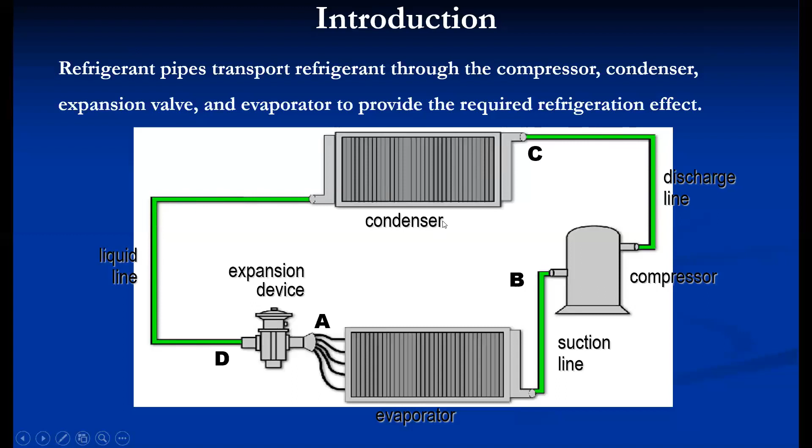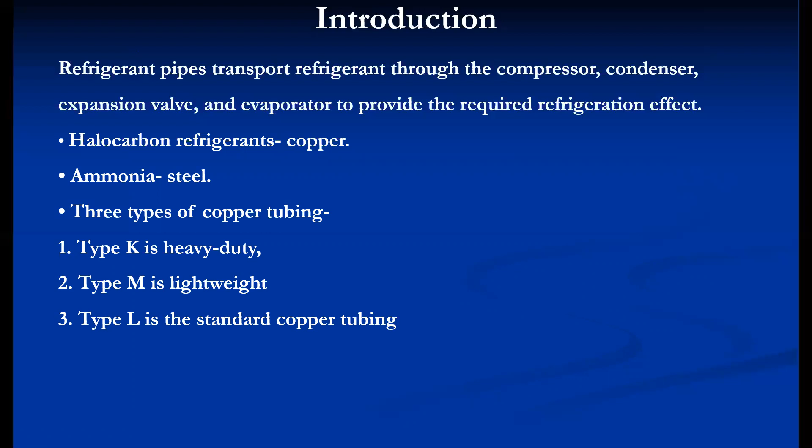As far as piping is concerned, for halocarbon refrigerants, copper piping is recommended. For ammonia, since ammonia attacks copper, steel piping is used instead. There are three types of copper piping generally used: K type is for heavy duty where the pressure range is high, M type is lightweight, and L type is standard copper piping. For most applications, L type piping is used.

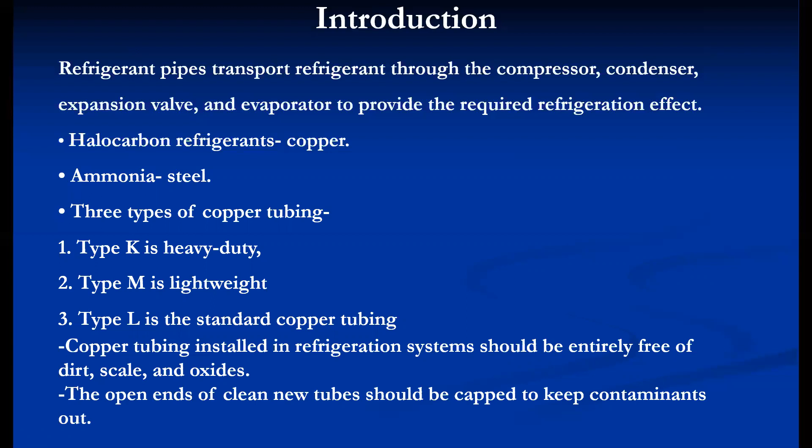Copper tubing installed in the refrigeration system should be entirely free of dirt, scale, and oxide. Initially, the open ends of clean new tubes should be capped to keep contaminants out. During transportation of copper tubes, sealed copper tubes are used so that dirt particles or scale oxides do not enter, because if air or dirt is present inside, it creates an oxidation reaction during the brazing process. So care is taken for the copper piping.

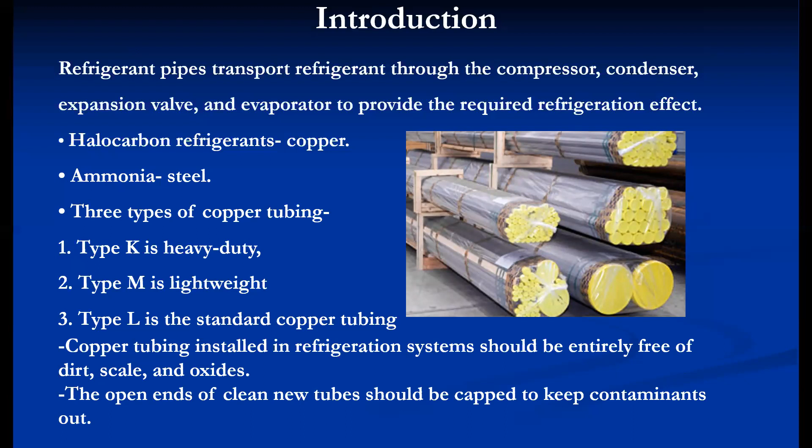So this is a brief introduction to refrigerant piping. In the selection of pipe size and material, the following points must be considered.

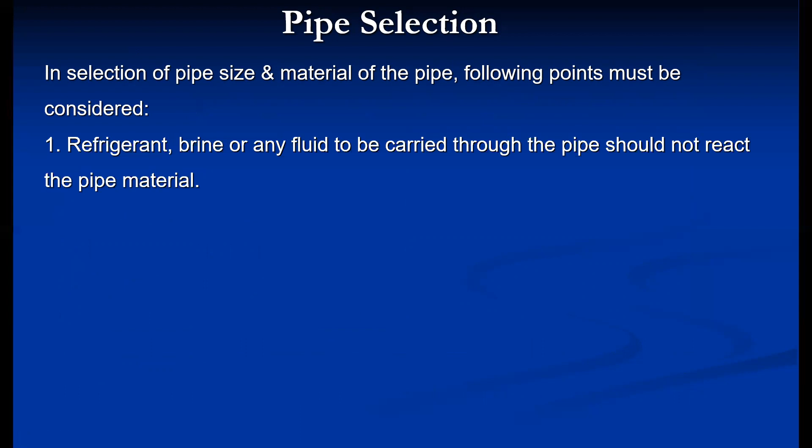The refrigerant, brine, or any other fluid carried through the pipe should not react with the pipe material. The pipe size should be large enough that it does not create excessive frictional losses, and also avoids objectionable noise because of high velocity. It must withstand the pressure of the fluid—this care is taken while selecting piping for the discharge line.

The cost of the pipe should be minimum, or it is perhaps a last preference—it should not be compromised with quality. As far as possible, the minimum piping is recommended for minimum refrigerant quantity. So the cost factor is considered, but not as a prime factor.

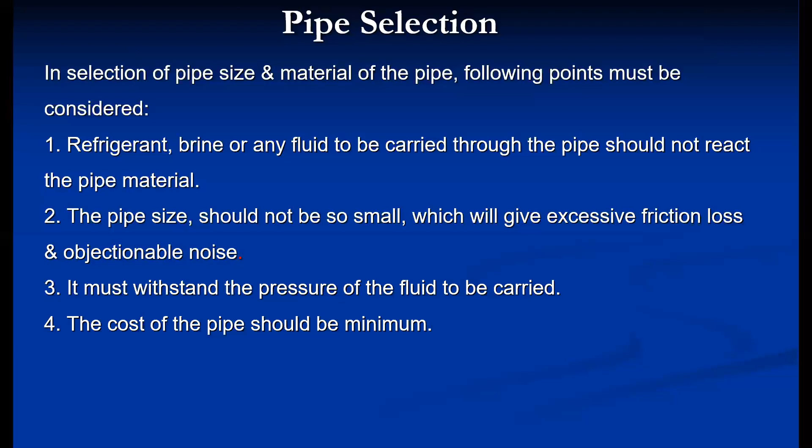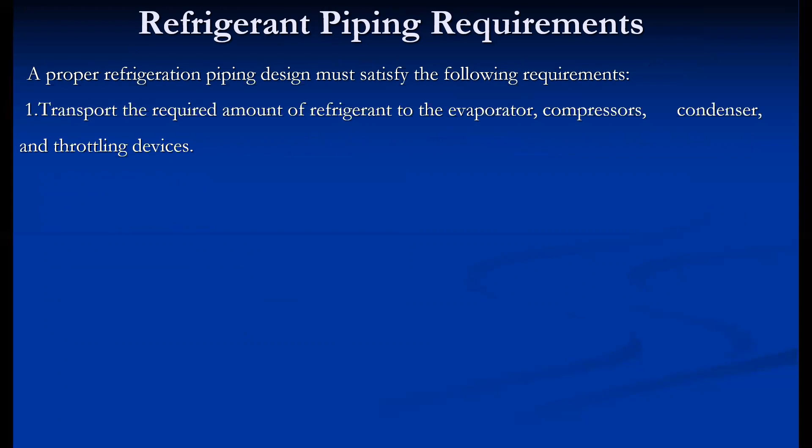Regarding piping requirements, proper designing of refrigerant piping must be there for smooth operation of the refrigeration system. It must satisfy the transportation of the amount of refrigerant to the evaporator, compressor, condenser, and expansion devices, so proper circulation with adequate velocity should be there.

It should provide the optimum pressure drop in the refrigeration lines. In order to avoid excessive pressure loss, some bends and excessive length are not provided. So pressure drop should be optimum, because the pressure drop causes considerable effect on the performance as well as the COP of the system.

It should ensure the adequate velocity to return the oil to the compressor at all steps of unloading of the compressor, to maintain an adequate level for proper lubrication. Because generally the system is working for different capacities, and depending upon the capacities, the refrigerant flow rate varies. So the adequate velocity should be maintained even for the low capacity to return the oil to the compressor, because there should not be any shortage of oil in the compressor, to increase the life of the compressor. So that care is to be taken.

Generally, where the oil separator is not installed, in that case, the adequate velocity is a must.

Flashing of liquid refrigerant must not occur before the expansion valve. In the liquid line, there is some heat addition that takes place after subcooling also. Due to heat addition, some liquid refrigerant, even at high pressure, if exposed to ambient conditions like a liquid line at 40 or 45 degrees Celsius, there is a possibility of heat gain, and due to that some refrigerant gets evaporated. If flashing happens before expansion, it may reduce the mass flow rate through the expansion valve. So as far as possible, flashing of liquid refrigerant must not occur before expansion. It is not at all desirable.

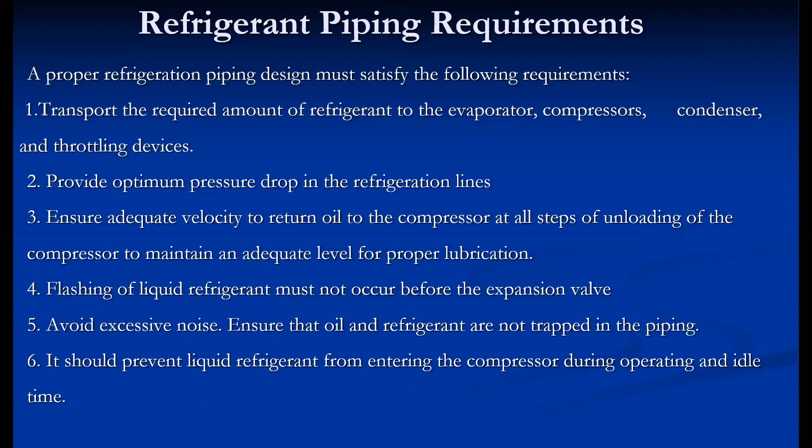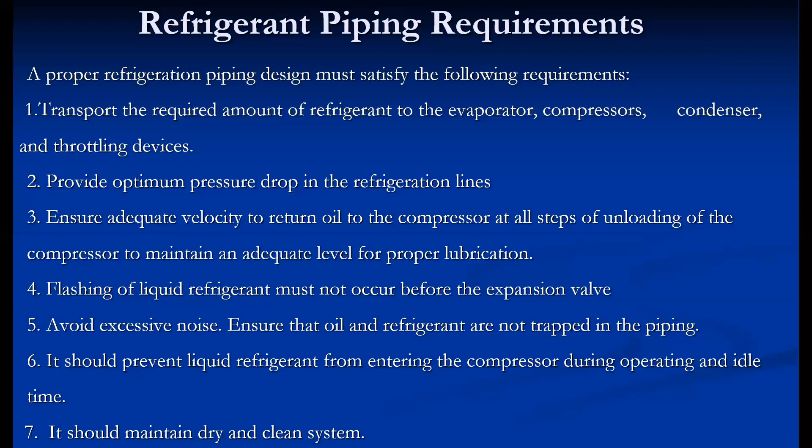It should maintain a dry and clean system, so there should not be any leakage, especially at the surface. All the surfaces should be dry and clean, because even some dust accumulation will prevent the rate of heat transfer. So these are the considerations, the requirements for a good design of piping. There are seven design requirements.

General piping requirements: it is recommended, if there are no stringent requirements, to use type L copper piping or tubing. For copper-to-copper joints, BCuP-6 without flux is used for the brazing operation. For copper-to-steel joints, BAg-28 non-acid flux is used.

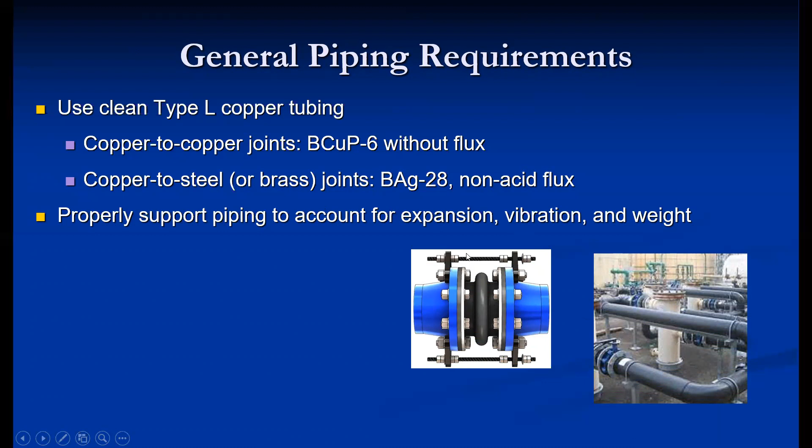Then properly support piping to account for expansion, vibration, and weight. Proper support should be given to the piping, and proper clamping should be there to account for the expansion of the piping due to heating.

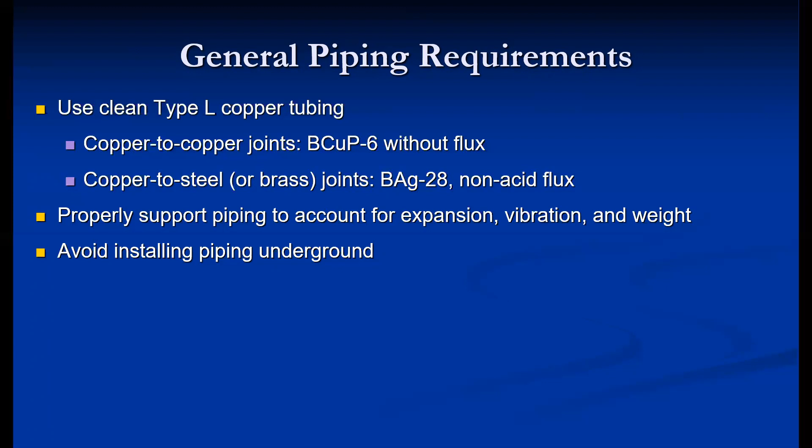Then avoid installing piping underground. Underground piping is not recommended for refrigeration applications, because it's very difficult to recognize a leak. In case of a leak, we need to dig it out. So underground piping is not recommended.

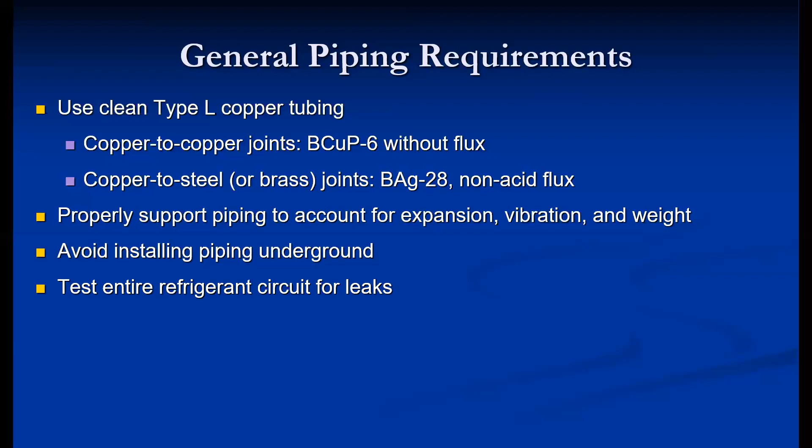Then test the entire refrigerant circuit for leaks. Before charging, it is very much essential that the entire circuit should be leak-proof, because if a leak is present, the refrigerant loss is a costly affair. Even if a leak is available, after charging the refrigerant, after a few days the entire system will be vacant. So to avoid that, the system should be tested leak-proof with nitrogen gas.

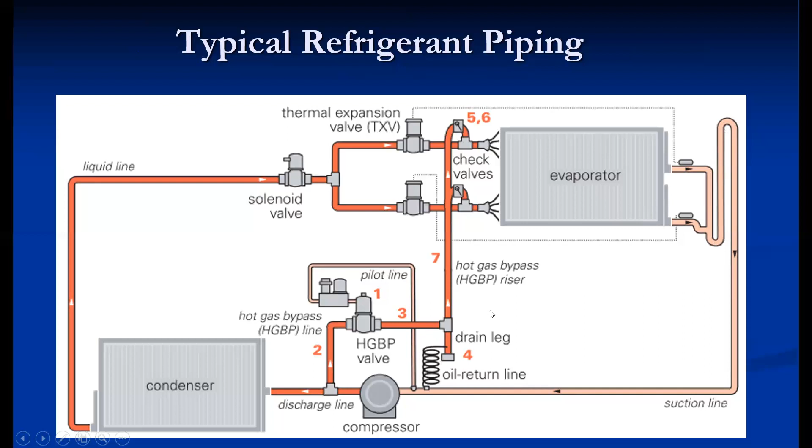The suction line is designed to avoid the entry of liquid into the compressor. So a suction line riser is used here. This riser traps the liquid refrigerant and doesn't allow any liquid refrigerant entering into the compressor. This is a typical refrigerant piping layout.

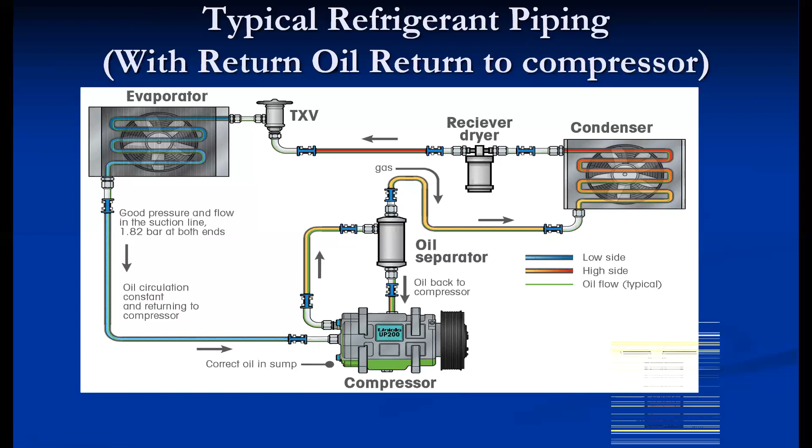Generally, if you see the distribution of refrigerant in the entire system, the maximum amount is present in the condenser, followed by the liquid line, followed by the evaporator. In the evaporator, it is in gaseous state, so the volume is more but the mass quantity is less. Then the suction line, compressor, and discharge line, the high pressure line, have comparatively less mass quantity.

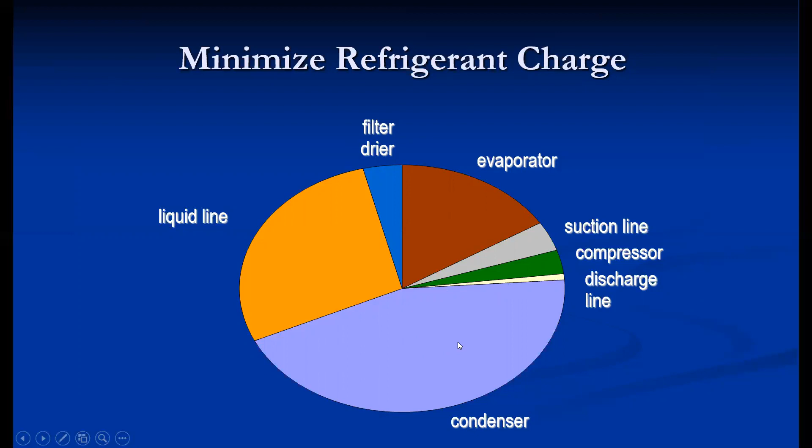So the maximum amount of refrigerant is present in the condenser, so to minimize the refrigerant charge, optimization of the liquid line, evaporator, and condenser is required, so that the quantity is as low as possible, or an adequate quantity is charged.

And then there's the sizing of the copper tubing. Copper tubing is generally sized with the help of the pressure drop equation. Refrigerant piping is designed mainly on the basis of practical line sizes without excessive pressure drops.

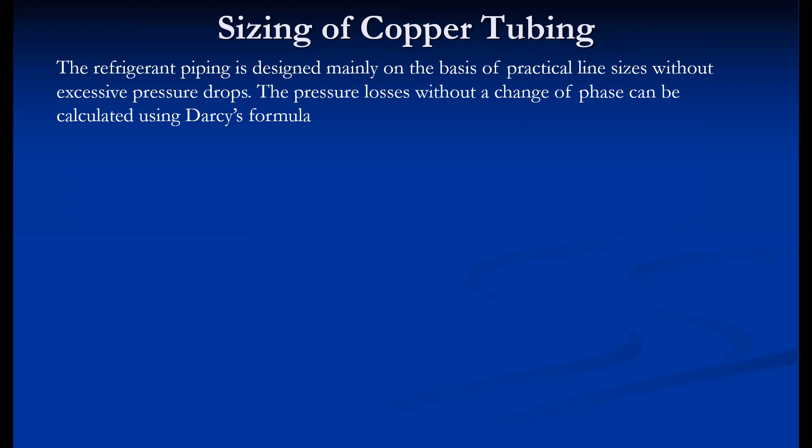Pressure losses without a change of phase can be calculated using the Darcy-Weisbach equation. Generally, the minimum and maximum allowable pressure drop in the lines is already decided, and based on that, we can use the Darcy-Weisbach equation.

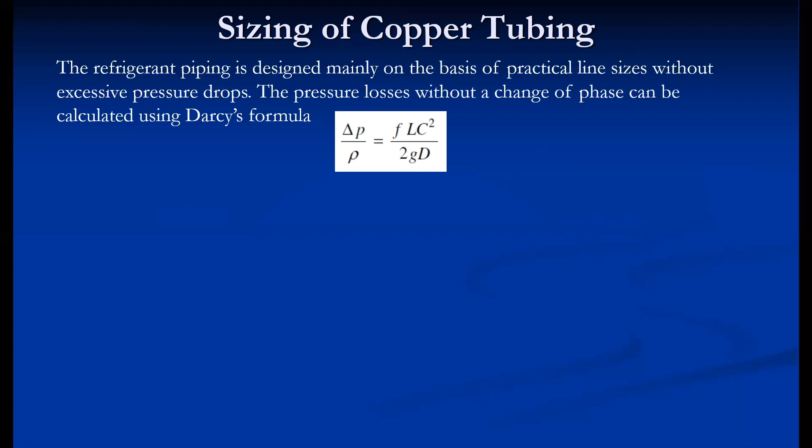This Darcy-Weisbach equation is only applicable for single phase fluid. Wherever there is a single phase fluid, except evaporator and condenser side, everywhere there is a single phase. Here delta P is the pressure drop, rho is the density, L is the length of the pipe, D is the diameter, C is the velocity, F is the friction factor.

For friction factor F in the suction and discharge lines, a value of 0.003 may be taken. Actually this is F dash, 4F, so 0.003 is generally a friction coefficient that may be taken, whereas for the liquid line it is taken as 0.004.

During the sizing of refrigerant piping, the system refrigeration load is known to us. So instead of velocity, we can put it in terms of mass flow rate. Instead of C, we can put m dot R upon rho A.

So delta P equals rho, it goes to this side, rho FL, instead of C we can put m dot R by rho A, squared, and 2GD as it is. If you simplify this equation, that is FL m dot R square. The rho gets cancelled, one rho still remains, and area is the cross-sectional area, pi by 4 d square.

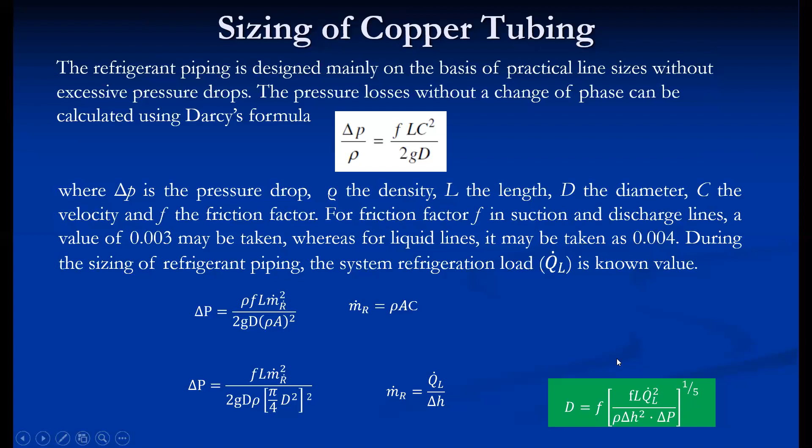All these quantities are generally known to us, so with the help of this, we can calculate the diameter. Once we get the diameter from the chart, we also get the velocity.

These are the lines of various diameters. Since we know the diameter and we know the capacity, we can locate the point on the chart and get the adequate velocity. This is how we can calculate the velocity.

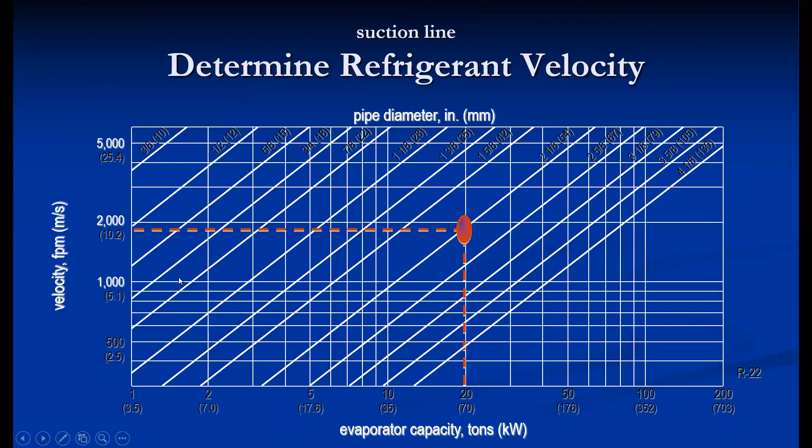So during the sizing of the piping, first we size with the help of allowable pressure drop, and then with the help of that diameter and capacity, we calculate the velocity. From the table, we can again cross check whether this is a permissible velocity or not. So there is a proper process of sizing for piping of any refrigeration system.

This is a typical refrigeration system, where there are different lines we can recognize. This is the suction line, this is the discharge line connecting compressor to condenser, then condenser to evaporator, which is generally the liquid line. So these are the lines - mainly there are three types of lines.

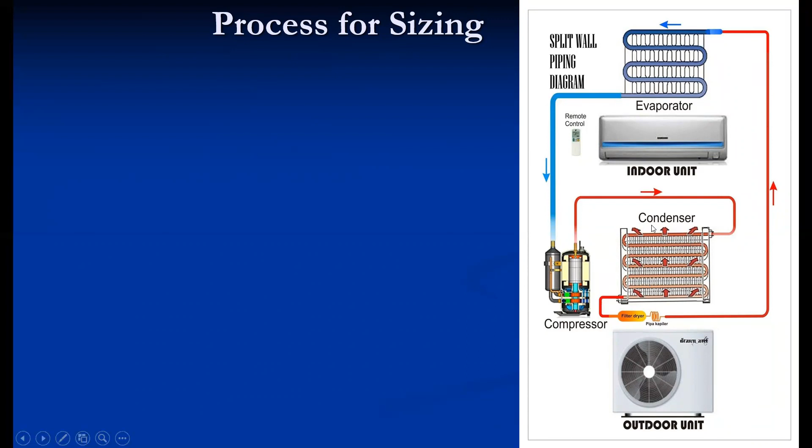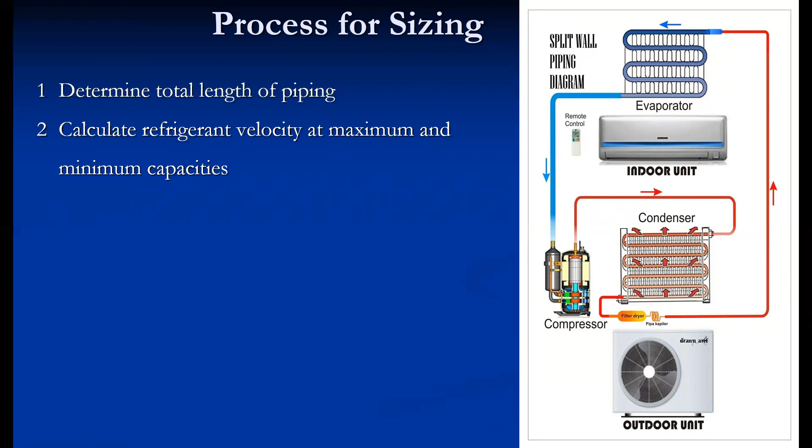The first step is to determine the total length of the piping. Generally, while designing the piping, the individual line is designed - for example suction line, discharge line, and liquid line. So first, while designing a suction line, determine the total length of the piping, then calculate the refrigerant velocity at maximum and minimum capacities, based on the diameter.

Then select the largest diameter that results in acceptable velocity at both maximum and minimum capacities. It is very much essential that you should calculate the velocity for maximum loading as well as minimum loading.

So QL dot, that expression we have seen, diameter is a function of cooling capacity, and velocity is a function of diameter. Based on that, we first determine the lowest possible cooling capacity. From that lowest capacity, we determine the diameter. For the highest capacity, we determine the diameter, and the corresponding velocity also we can determine.

Then the total equivalent length of the straight pipe and fittings is calculated. There is a table available where for various pipe fittings, the equivalent length is given. Accordingly, the total equivalent length is determined for various fittings. Then for that entire equivalent length, the pressure drop due to pipe fitting is calculated, and checked whether it is allowable, and pressure drop due to accessories is added.

This way, pressure drops are calculated, and from the table, the recommended values are checked. Check whether that pressure drop is allowable, or whether it is less than the maximum allowable pressure drop. Accordingly, the design is validated. So this way, the process of sizing takes place.

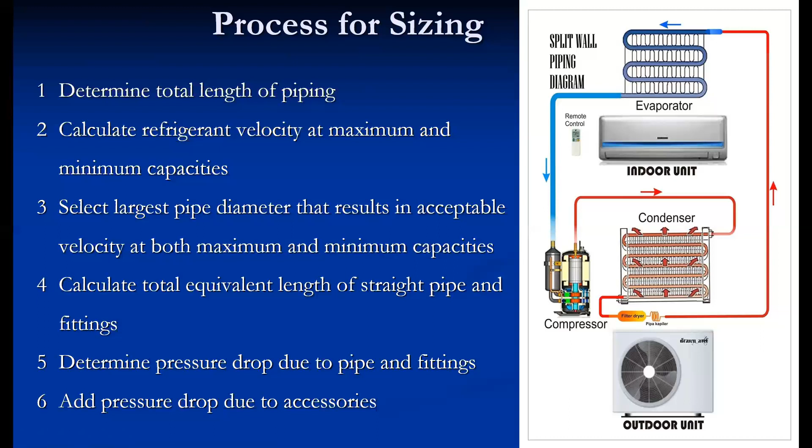The suction line is the most critical line, from the viewpoint of design and construction, because it must ensure adequate velocity to return the oil to the compressor. That is the main rule. Secondly, it should not allow any liquid particles entering into the compressor.

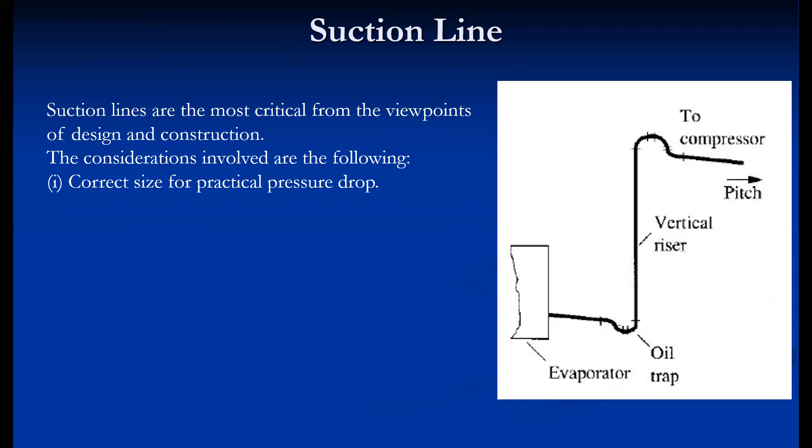So the considerations involved are as follows. The correct size for practical pressure drop: pressure drop should be as low as possible, because it is connected to the suction. But that pressure drop leads to increase in compressor work, which is not desirable. So correct size for practical pressure drop is recommended.

The line must be capable of returning oil to the compressor by entrainment of the suction vapor under minimum loading conditions, especially in the case of fluorocarbons. For high capacity, most of the time the suction vapor entrains the oil to the compressor, but especially for low capacity, there is a problem.

Even for the low capacity or minimum capacity, adequate velocity should be maintained, so that whatever oil particles are present or coming out from the evaporator, they enter into the compressor. That care is taken — the line must be capable of returning the oil to the compressor.

If there are suction risers, the gas velocities to ensure oil return have to be increased, because the suction riser is generally provided to prevent liquid particles entering into the compressor. But at the same time, the riser height must be sufficient so that the oil droplets may carry over with the suction vapor. That care is to be taken.

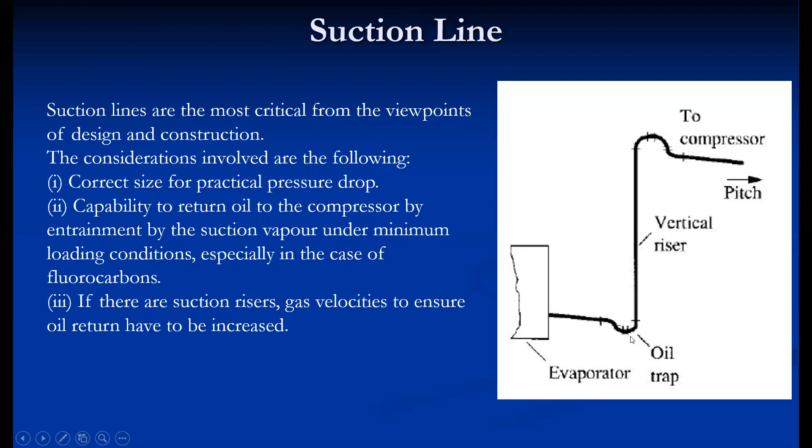Sometimes at low velocities or low capacities, there is a possibility of oil accumulation. If the entire trap is filled with oil, it may block the refrigerant from entering into the compressor, causing a blockage of flow. To avoid this, double risers are used.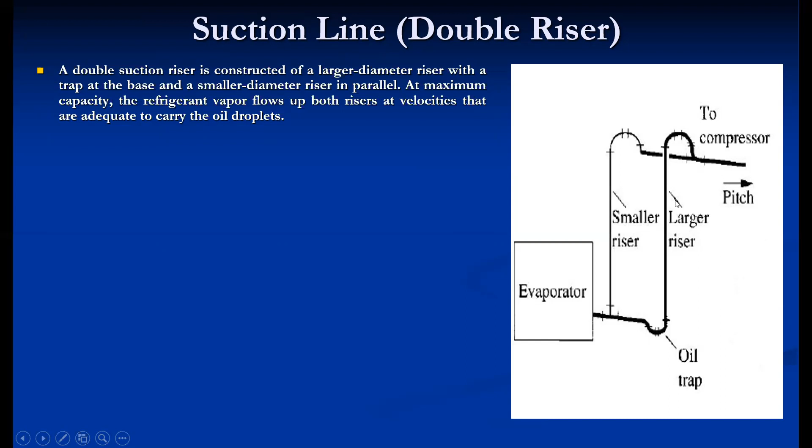A double suction riser is constructed of a large diameter riser with a trap at the base, and a small diameter riser in parallel. At maximum capacity, refrigerant vapor flows up both risers at velocities adequate to carry the oil droplets, so there is no problem since the oil velocity through both risers is sufficient to carry the oil droplets.

But at minimum capacity, the refrigerant velocity in both risers becomes too low to carry the oil droplets, so oil from both risers drains down. There is no possibility of oil rising into the tube, so it drains down and is collected in the oil trap.

When this trap becomes completely filled with oil, it prevents the refrigerant vapor from flowing up the large riser and diverts all the refrigerant up the small riser.

Especially for small capacity, the oil drops into this line and fills the oil trap, because at minimum capacity the oil velocity is not sufficient to carry this oil through the riser, so the oil drops and collects in the oil trap.

After some time, this oil trap is completely filled with oil, which blocks the flow through the large riser, and maximum flow takes place through the small riser. Since this is a smaller diameter, the velocity is still adequate, greater than in the larger riser, so the refrigerant is made to flow through the smaller riser.

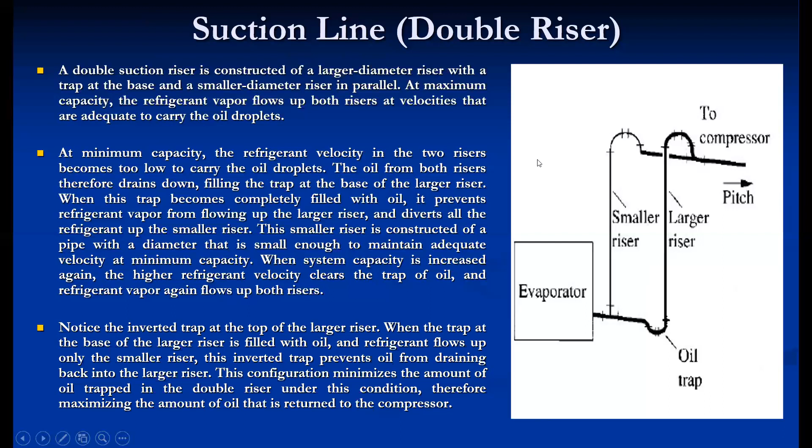But if the capacity variation span is more, suppose 10% to 100%, then it is recommended to have the double riser for the suction line.

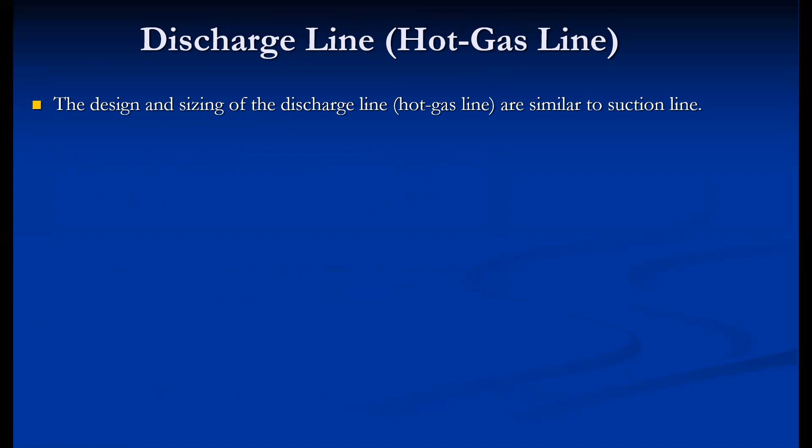The discharge line is called hot gas line. The design and sizing of discharge lines are similar to the suction line, because both are gas lines. Similar to the suction line, oil return and optimum pressure drop are the primary considerations in the discharge line.

In the discharge line, oil doesn't mix with gaseous refrigerant; generally the oil is in the form of mist. That's why an oil separator is provided to trap that mist, since it is entrained in the gaseous refrigerant at the discharge outlet of the compressor as oil mist.

This piping line must be able to withstand the discharge pressure and temperature, because the maximum pressure and temperature occur in the discharge line. So whatever piping is provided must withstand that pressure and temperature as well.

The allowable pressure loss in the discharge line is hardly 10 to 20 centimeters of Hg, and the recommended velocity is 300 to 500 meters per minute.

Friction in the line increases the power requirement of the compressor, which is why specific velocity and pressure loss limits are recommended. While designing, these two factors must be taken into account: pressure should not exceed about 10 to 20 centimeters of Hg, and velocity should not exceed 300 to 500 meters per minute.

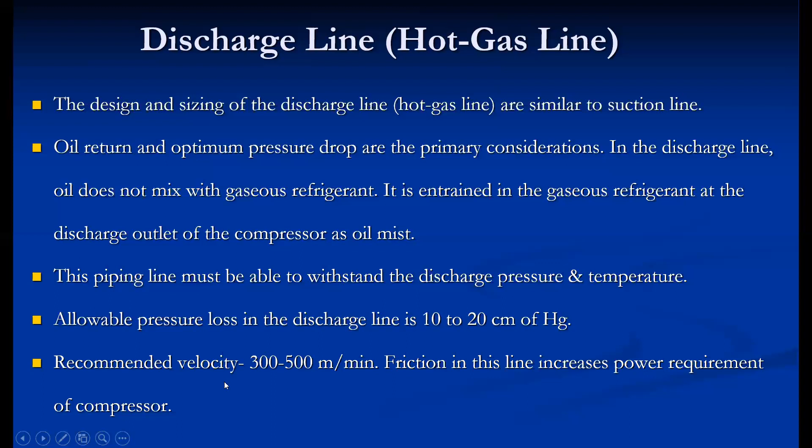About the liquid line: its main role is to carry liquid refrigerant from the receiver to the expansion valve.

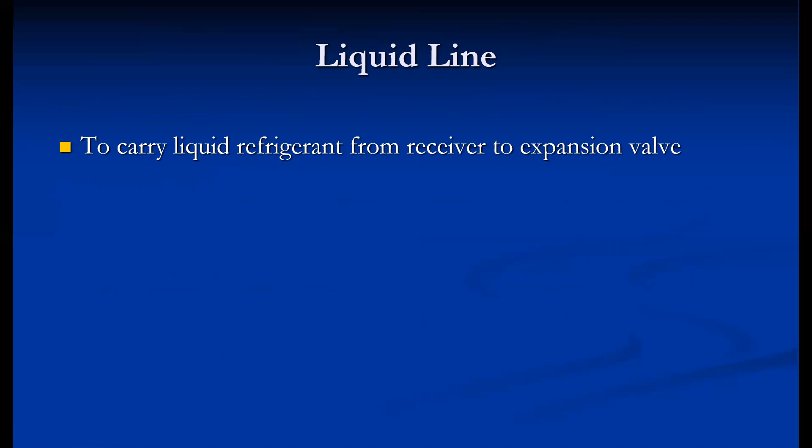Friction loss has no considerable effect on capacity and power in the liquid line, so it's not a very significant factor. But friction losses can cause evaporation of the refrigerant if excessive friction happens, which is not desirable because it reduces the mass flow rate through the expansion valve. So friction should not be too high, since it mainly causes evaporation due to drop in pressure.

The allowable pressure loss here is a little more stringent, that is 1 centimeter of Hg per meter of length.

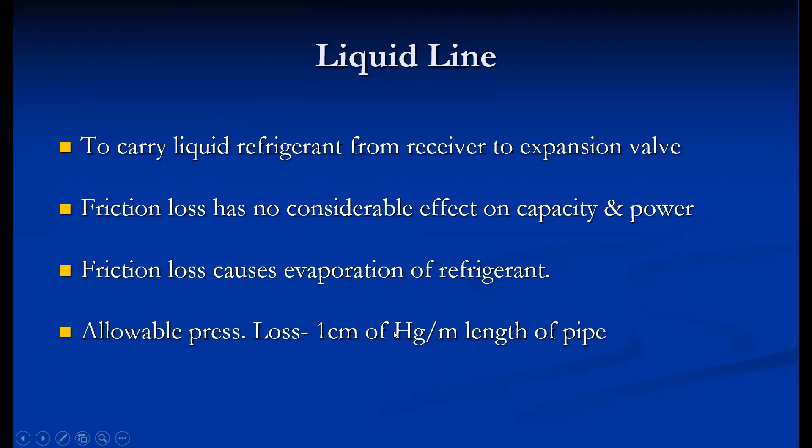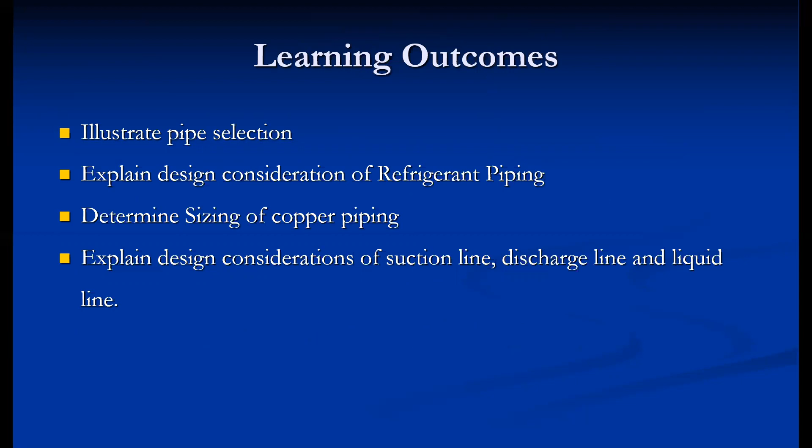So these are the four factors. At the end of this topic, you should be able to illustrate the considerations during pipe selection, the design considerations of refrigerant piping, how to determine the sizing of copper piping, and explain the design considerations of the suction line, discharge line, and liquid line. With this, this topic is completed.